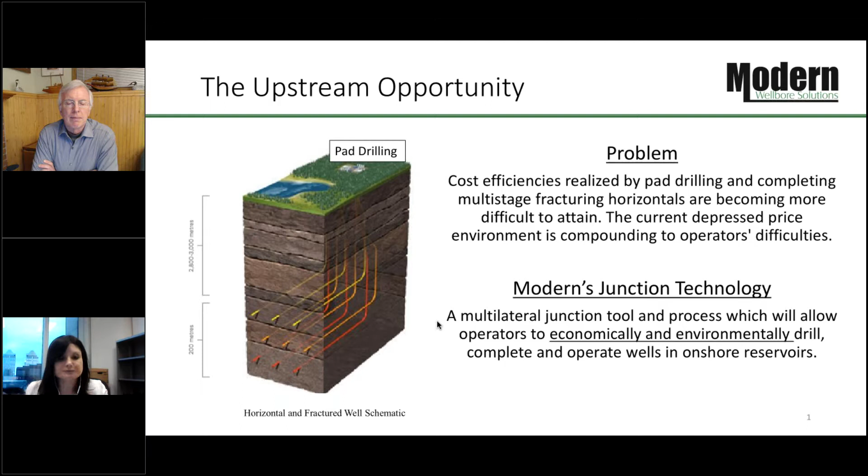Modern's Wellbore multilateral tool and process is an innovative solution to help reduce the petroleum industry's environmental footprint and foster social and economic benefits per multilateral well.

Basically, it works by a tubular system that couples and moves during operations to build the subsurface junction from the surface using a drilling rig. The technology can be run in the same or different fractured reservoirs, providing optionality to the end user.

Current technology options create the following barriers for unconventional resource development: multiple costly and time-consuming well entries in order to install current market junctions and options, limitations to the internal diameters of the junctions on the market prohibiting passing of fracturing tools, as well as the pressure integrity of the junction being dependent on costly well construction design and modification during operations, leading to costly operations for the end user.

Basically, Modern's technology realizes cost efficiencies to the end user through single entry systems into the well with no diameter barriers, and pressure integrity operations is achieved within the tool. We are a patent pending technology.

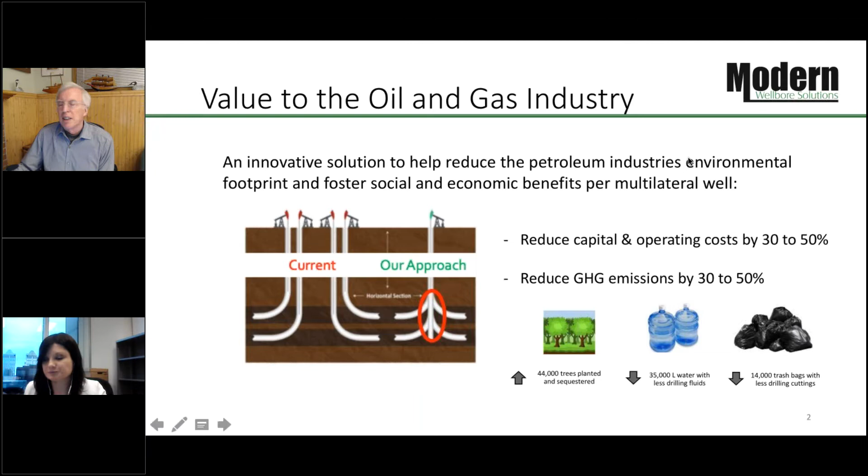Great, thank you Kara. That's a great overview, and it's from the network here. It's a non-traditional way of reducing both GHG and methane and fugitive emissions. And Shay, do we have questions from the audience? No questions so far, Mark. So I'll just ask Kara to elaborate a bit on both the GHG and the methane.

So the GHG are mostly from not drilling so many vertical wellbores, right? That's diesel and energy consumption. Yeah, exactly. So the bulk of the emissions are from less construction intensity at the front of the installation - bringing all of your materials to the well site and all your trucking, and then your rig time and the operations for drilling that vertical well down to your target zone of interest. That is the bulk of the emissions savings, due to the changings of regulatory requirements when all the methane, zero methane well site changes happening in the upcoming future.

We're constantly reevaluating and looking at our emission savings as we develop pilots over the next several years. We'll be quantifying that from the end user third-party validation. But yes, there is a significant savings from the construction intensity of moving away from a single wellbore lateral to one vertical and multiple laterals.

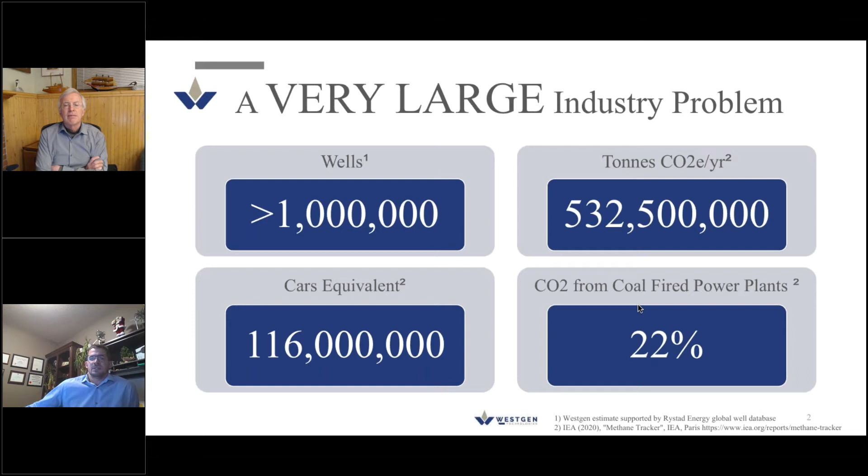Real quick refresher on how gas pneumatics work. In our industry, we use high pressure gas for things like opening and closing control valves, measuring process conditions, and running injection pumps. The problem is that on most remote locations, we don't have access to compressed air, so we have to rely on high pressure gas from the well. And after we use that, we vent it to the atmosphere.

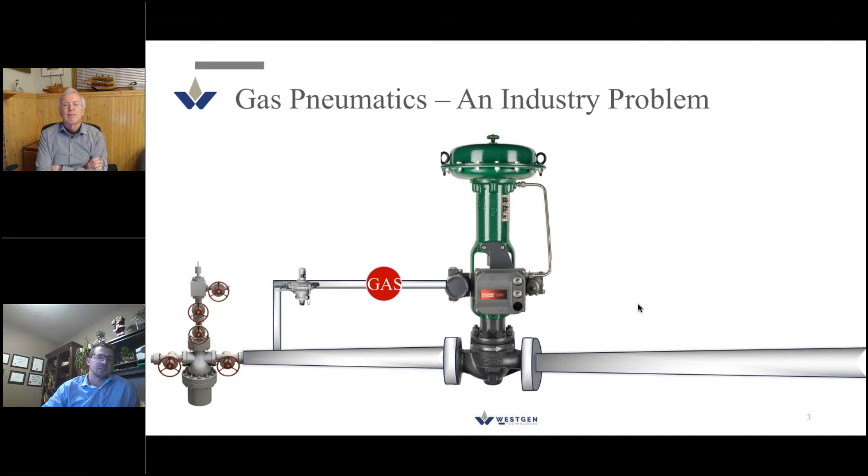There are 2 solutions to this problem. Electrification of actuation and pumps is typically a cost-effective route for smaller pads. This option can become cost prohibitive as you move up to more wells per site, typically once you get over 3. It also has a couple of drawbacks from speed and delivery times. The other option is to replace the high pressure gas with compressed air, keeping your traditional pneumatic actuators. Both options do require additional power.

When Westgen started up, we ran into a small problem with this that we didn't expect. We call this the power generation gap. I know it sounds a little bit ridiculous, but you can pick up a 5 kilowatt generator at Canadian Tire for less than $1,000. If you want something with the reliability you need for a remote location, they really don't have any technologies that fit between 5 and 30 kilowatts. Traditional options like TEGs and fuel cells tend to stick under about 1 kilowatt, and when you get into microturbines or traditional natural gas recips, you're over 30 kilowatts.

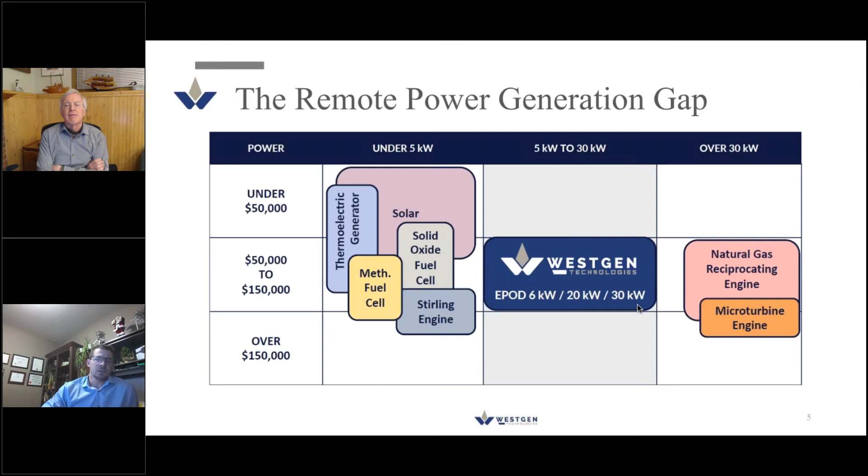So about 3 years after we set out to solve this goal, we developed the EPOD, which stands for Engineered Power on Demand. EPOD is primarily solar power, but has an internal combustion engine that backs up, capable of operating on raw well gas. For the first time, limitations of these engines related to fuel gas quality and maintenance interval have been overcome, while not causing increases to capital cost or maintenance costs for producers.

By integrating some of the common well site components into a modular shop fabricated package, we were able to reduce the capital cost of new well sites compared to today's gas venting designs.

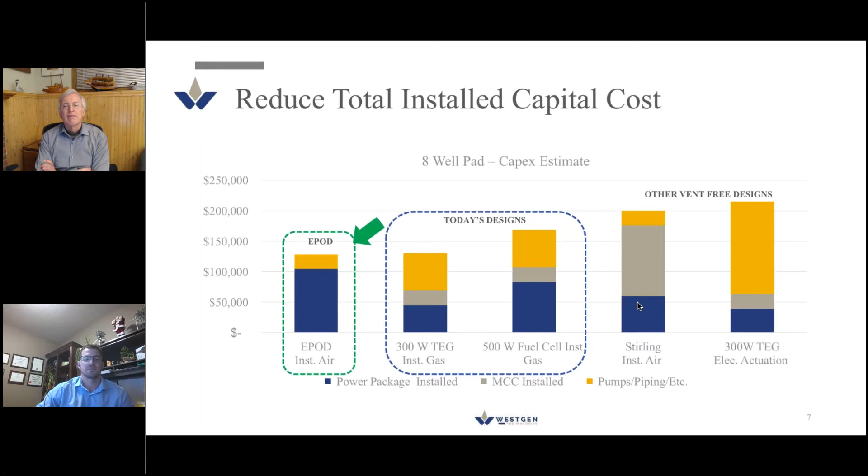By eliminating gas venting and reducing gas usage, the EPOD only burns 1 to 3% of the gas that you would typically be venting. We were able to increase the reliability of a site over winter by eliminating freezing conditions and reduce annual operating costs for these sites.

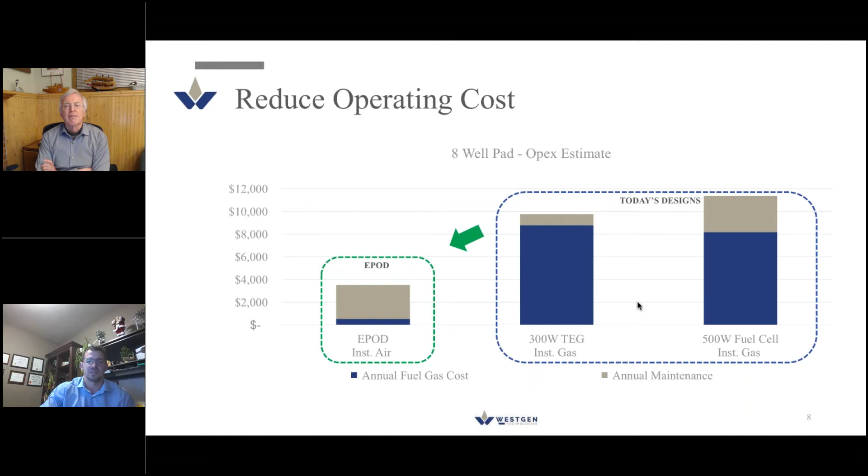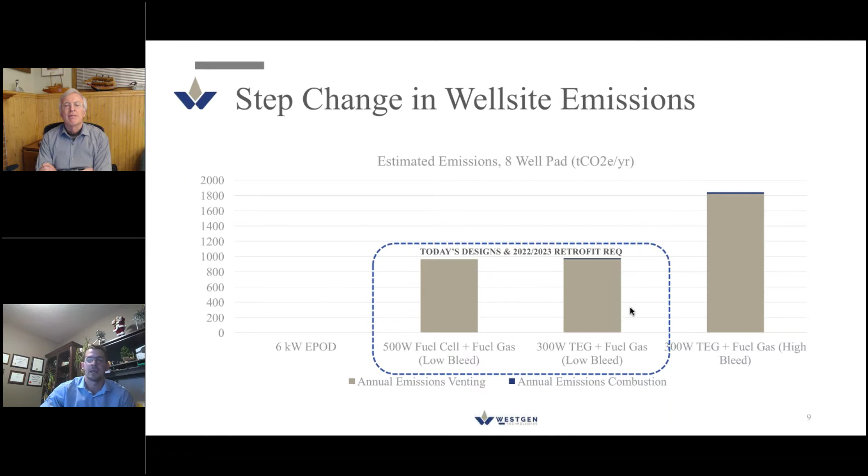We also worked with a recognized subject matter expert in the pneumatic emission space to estimate emissions from well sites. We found that even after high to low bleed retrofits were performed, there was still a large amount of venting from dynamic actuation of the actuators. By moving to an EPOD system, we were able to create a step change in well site emissions, going beyond low bleed and able to reduce emissions by greater than 99% on an average well pad.

Within a first year deployment, we now have dozens of units deployed or in the works with 17 different oil and gas companies across Canada and the United States.

In the beginning of 2020, we started to look to move the solution into the retrofit market. The EPOD was designed with incorporating and modularizing as many features as possible to minimize fieldwork and construction time on new well sites. Existing well sites don't have this challenge. So with that in mind, we set out to develop a purpose-built solution for the retrofit market.

In conjunction with Emissions Reduction Alberta and Sustainable Development Technology Canada, as well as 11 producer partners, this project kicked off over the past summer. As part of this project, Westgen conducted field monitoring of dozens of brownfield sites to better understand real-world design conditions and improve modeling of emissions.

Westgen is currently in the process of deploying 10 EPODs to legacy sites for the purpose of data gathering. By coordinating the design, construction, and maintenance of these units, we're able to develop a better development strategy and understand some of the difficulties that we face when deploying these on legacy sites.

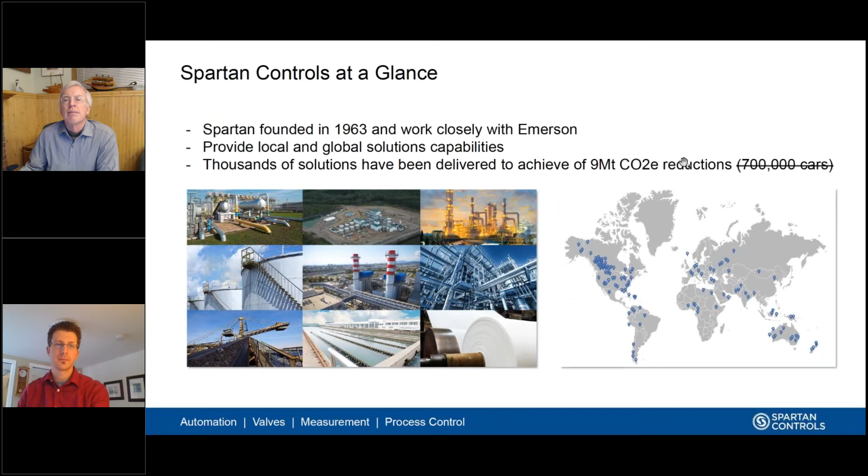So I'll introduce Kendall at this point, and he can share some background as well. Yeah, thanks, Brian. Hey, Kendall here with Bonavista. Bonavista is a mid-size natural gas production company based primarily in Alberta. My recent focus has been looking at GHG reduction projects, and I worked closely with Brian and Spartan on installing an LCO air compressor and glycol heat trace pump.

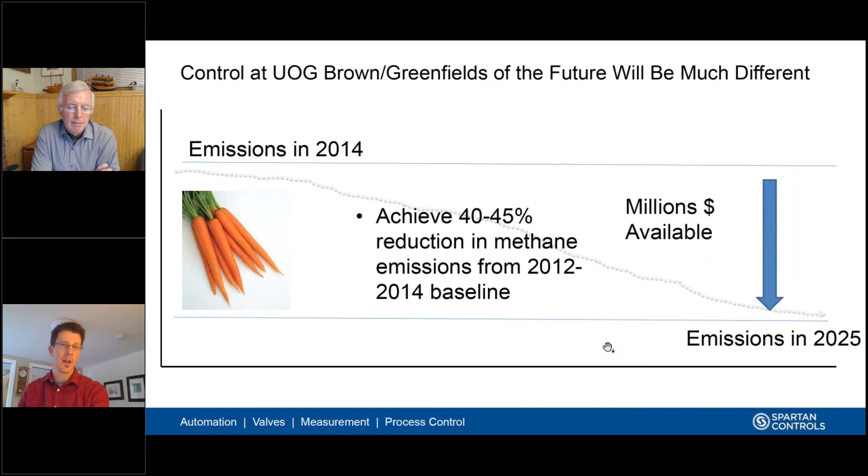Perfect, okay, so back on the slide deck. For those of you that were able to join at the methane emission reduction forum online, I had this slide as well. Industry is faced with this goal of achieving a 40 to 45% reduction in methane emissions from a 2012-2014 baseline. There are millions of dollars being invested in this, and we view that as a carrot for industry to take steps towards compliance in a more cost-effective manner. So kudos to PTAC with the support they've provided through the Methane Consortia program. That's really been an enabler for the adoption of the LCO Crossfire as well.

So if you're not interested in carbon offsets, there's opportunity with other levers as well that can reduce your capital cost to implement. PTAC has this program supporting the LCO Crossfire both as a chemical injection pump, electric, and an air compressor, and we have a project window until May 2021. What was really nice about this funding is that we had a decent window to apply for it, and once you get the nod, a decent window to implement. So we're achieving a specific, measurable, achievable, reasonable, and timely outcome. It was really well set up.

With the PTAC funding, 50% of the costs can be covered, provided in 3 increments. Upfront, they give a third of the capital of their 50% towards getting it going. Then upon proof of purchase and installation, we can have the other third provided. And once you've shown what that technology was able to achieve as far as CO2 reduction, we get the final third from PTAC.

What's also really valuable is that this is stackable with the MTIP funding. You still need to meet the criteria of MTIP, making sure that your technology is less than $130 per ton on an annual basis, or less than $40 per ton in the lifetime of the project. These can be combined to actually fully cover the capital cost of the project in its installed condition. Again, really helpful that these funds are available until May 2021. So if there's no interest in achieving an ROI with carbon offsets, reducing your upfront capital cost is certainly advantageous as well.

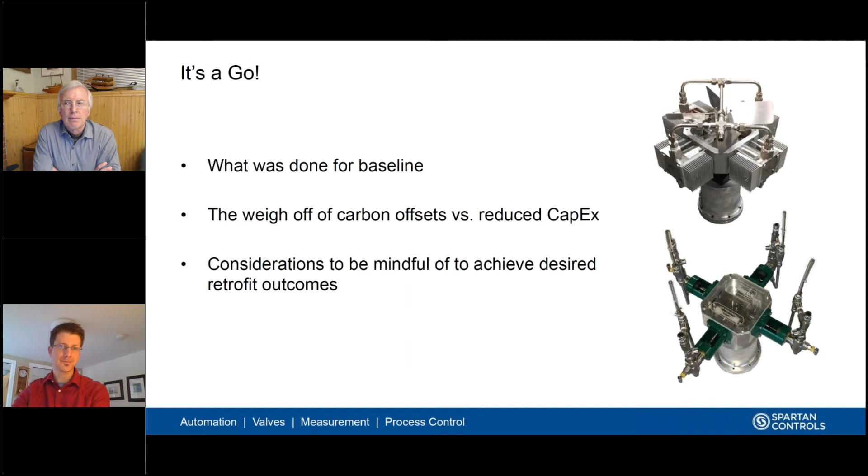If you drop below too far, then you may not be able to fully stroke the actuator, or fully stroke a chemical injection pump if it continues to run on instrument air, and therefore be unable to inject it into the process line at the needed flow rate required.

There were some leaks that we came across that needed to be fixed that were not associated with venting. These were more fugitive leaks, that they weren't leaking by design, but they need to be maintained. So it's really important to make sure that you're sizing the system, that it's fit for purpose, and that's achieved by mitigating some of the unplanned foreseeables as well.

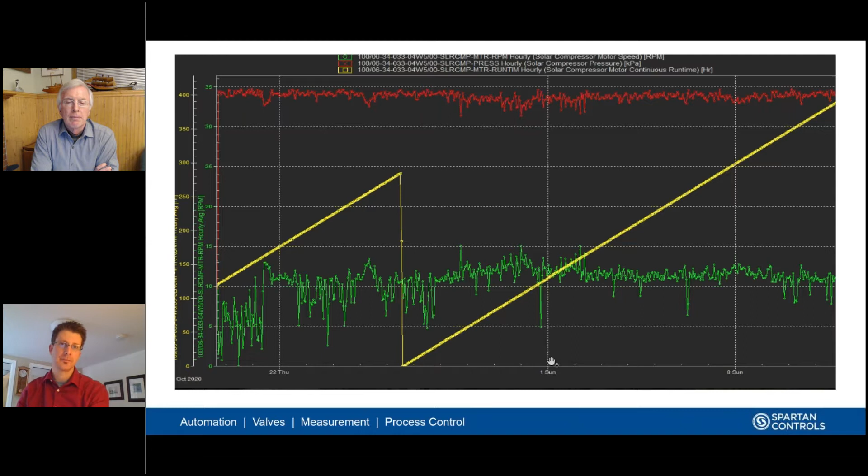Next. So I mentioned baseline, so what was done for the baseline? We want to reduce or eliminate - that's really the question we're asking ourselves.

If we're going to eliminate, one of the options is to shut in that asset. I don't think anyone here in Alberta or the Western Canadian Sedimentary Basin really wants to shut in a producing asset that's profitable prematurely for venting or fugitive conservation. So then we're left with: could we capture what's being emitted? Could we electrify the site, or could we use instrument air? All three of those are pathways to zero.

So then we need to figure out what sites are the best candidates. And if we're going to figure out the best candidate, we have to consider all the criteria that are there. We're mindful of the CO2 that's available to be generated, and that's tied to your fuel gas use, whether that's purchased or could be sold through its conservation.

We also want to understand what type of asset is actually venting. This goes beyond just merely making models - it's really important to be a subject matter expert in that domain, so we can provide more specific and holistic information. As Brian touched on, there's conservation with steady state reductions, but then there's understanding how active that control loop itself is.

How much is that actuator actually moving? And are there any other venting forms associated with the instrument? So you can have steady state, you can have the output pressure, and then you can also have a form of venting that's called transient. I know that was a consideration criteria with a level controller that we recently improved as well.

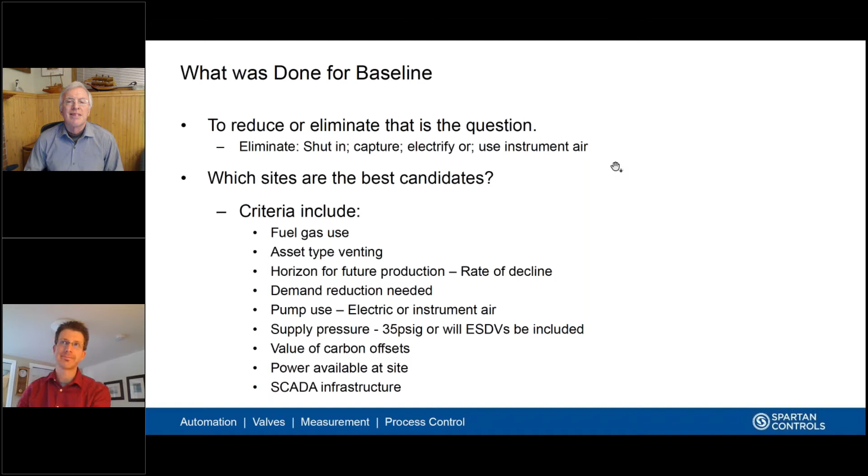Typical carbon offsets, again, are available for generation over an 8-year period of time, unless otherwise specified in the protocol specifically.

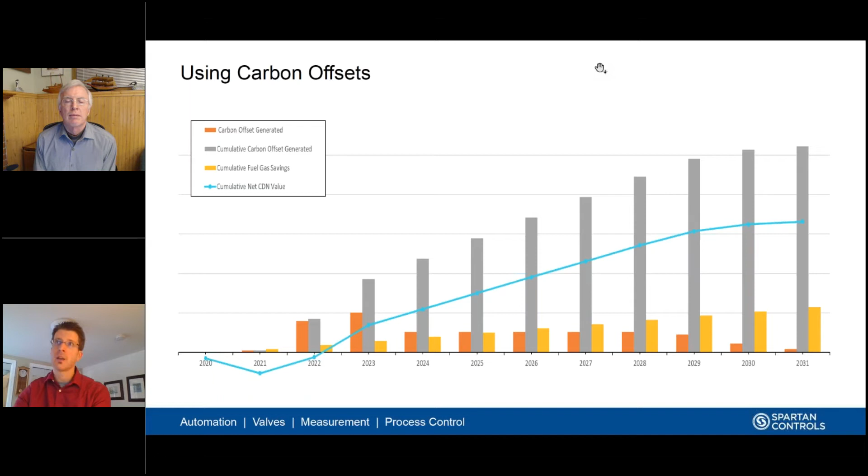So here we have a situation where we're not interested in carbon offsets, and here we just want to reduce our capital costs. So PTAC is instrumental in this regard, and if it can be stacked with the methane technology implementation program, we have the opportunity to recover that capital cost really quickly and realize the fuel gas savings. If the fuel gas cannot be sold, though, it's not really a value adder per se for the wellhead production - maybe this is an oil site and that fuel gas conserve just doesn't have the infrastructure to actually bring it to market.

If we do have that infrastructure, though, as you see on the next slide, then there can be a case for reducing your CapEx but still achieving an ROI because of the fuel gas saved as well. So it really depends what your goals are, as I mentioned up front - what the outcome is and how you want to plot your journey on achieving that outcome. There are certainly different ways to tackle this, and it really just depends on the drivers for your organization.

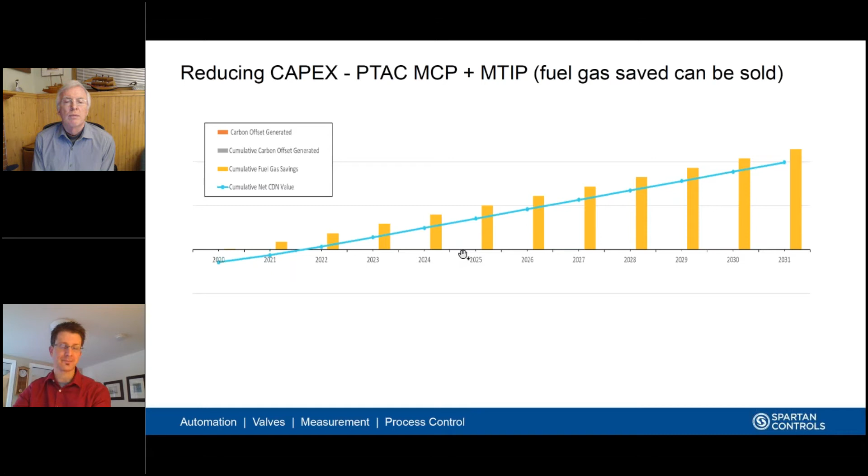We also want to be cognizant of the near and long-term outcomes. If we are willing to have a longer ROI on an air compressor, then certainly that's an acceptable opportunity through carbon offsets. But if we really focus on the near-term cash flow available, we want to make sure we're addressing that as well with a program like the MCP or MTIP, etc.

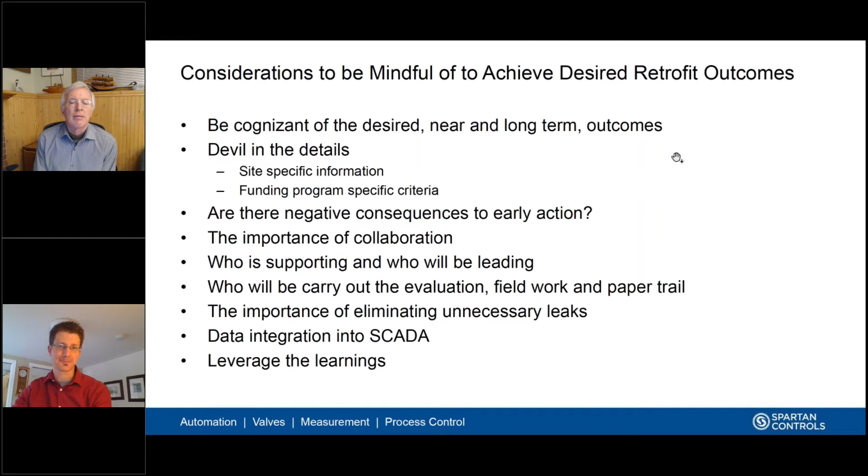So just checking if Kendall has final comments to provide on experience at Bonavista with these programs.

Yeah, no, I think Brian pretty much hit all the high points there. I don't really have a lot to add. So it's good to have all these options, right? Not all sites are the same, and not all circumstances, like Brian says, the baseline. So it's good to have options to find the right option for the right site.

So Shay, do we have questions? No questions so far, Mark.

All right. Brian, I just want to, it's probably obvious maybe, but just to reiterate from your side, it's a great time to be in for the industry right now, because there's a multiplicity of options to get the emissions down, whether it's in air or chemical pumps, or like putting everything down hole, like Kara at Modern Wellbore described. And there's also a multiplicity of funding mechanisms depending on the financial objective of the oil company or the baseline and the sites, right? So you can help people navigate through all that.

Absolutely, yeah. And I can add too that the MCP program still has opportunity to be aligning with other producers to do more work like I've described here today. So we have that window till May, and I'm happy to engage folks that are interested if there's a desire to do so. I should also add, Steve Froller wanted to pass along thank you very much to PTAC for the support to the organization, and also to the Industrial Research Assistance Program with NRC and Alberta Innovates too. You can see how integral those funding channels are to the commercial availability of this product here, built and made here in Calgary, which is a pretty cool story.

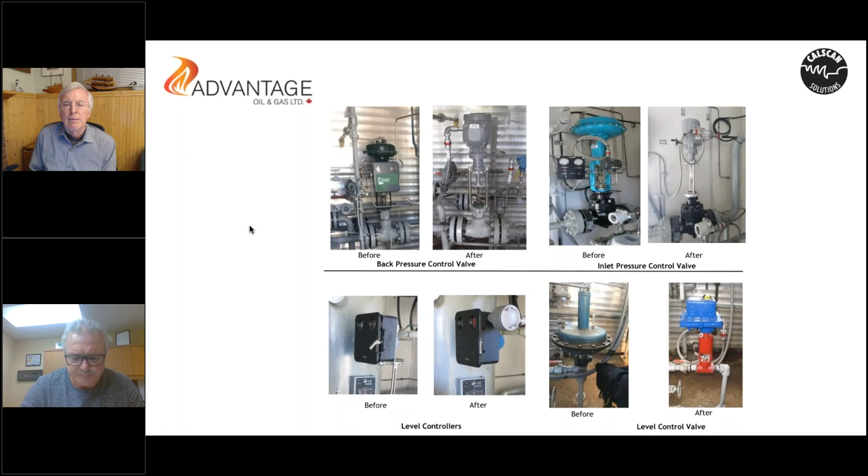Okay, next screen. And this I'll move over to James Martin, who has been one of our partners, consortium partners on our project. I'll pass it on to you, James.

Okay, thanks, Henry. So yes, I'm James Martin with Advantage Oil and Gas, and we're trialing this technology here from Calscan on electric chokes. Advantage is interested, for obvious reasons, in eliminating our methane emissions for all the reasons that Emil did such a good job explaining in his presentation. I notice he's gone, so Kara, if I could please ask you to pass on my kudos to Emil there. He explained very well why we want to get rid of those emissions.

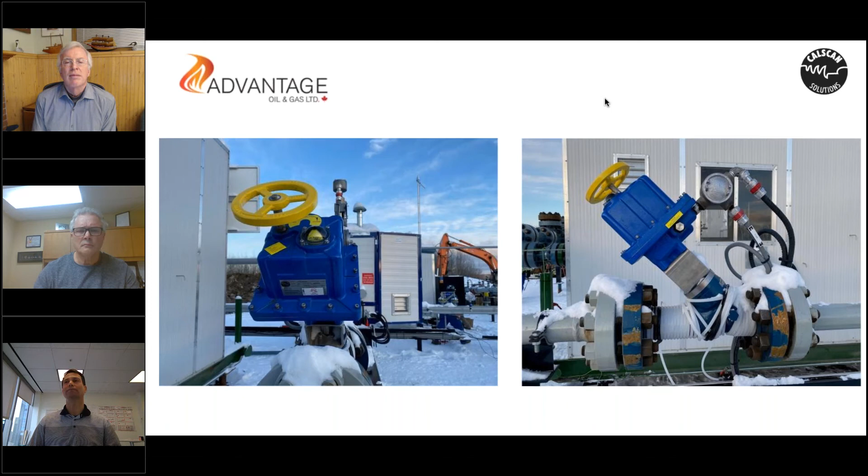Awesome. Very good, James. So, Henry, do you have some closing comments, or should I go to see if there's any questions?

No, I think, just going back, adding to James on the choke side of things. Again, those ones were 4 to 20 milliamp control through their RTU. Very low power, and didn't really have to upgrade any of the tags they have on site. And also we're adding our fail-safe modules at those sites.

That made a big difference for them on HAZOPs, making sure it is fail-safe. We have a heartbeat checking the RTU all the time. If the RTU fails, we can shut things down. On electric controls, that's very important to make sure we're able to shut the wells in safely, without having any kind of spills or damage.

So your approach is minimizing intrusion, if you will, at the well site, and therefore cost, and maximizing reliability as a result. Correct. Okay, so Shay, do we have any questions?

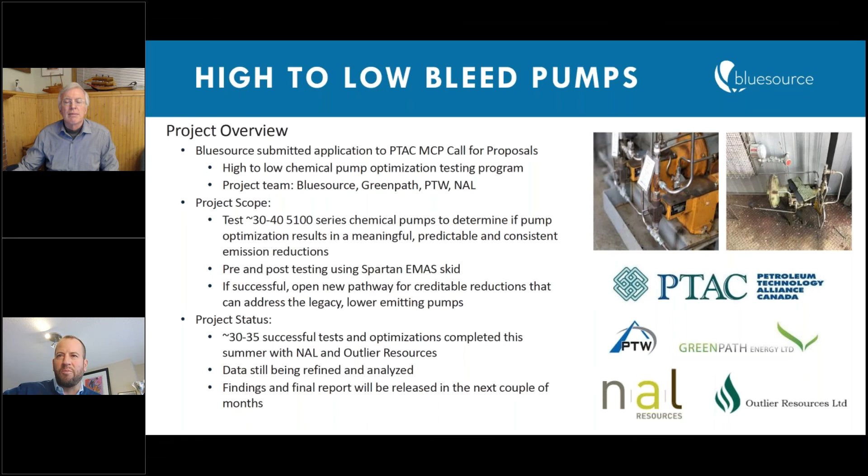So the status of this project is we've completed the testing. We have the initial data results. The data still needs to be refined and analyzed to complete our assessment, and we'll be looking forward to release a report in the next couple of months.

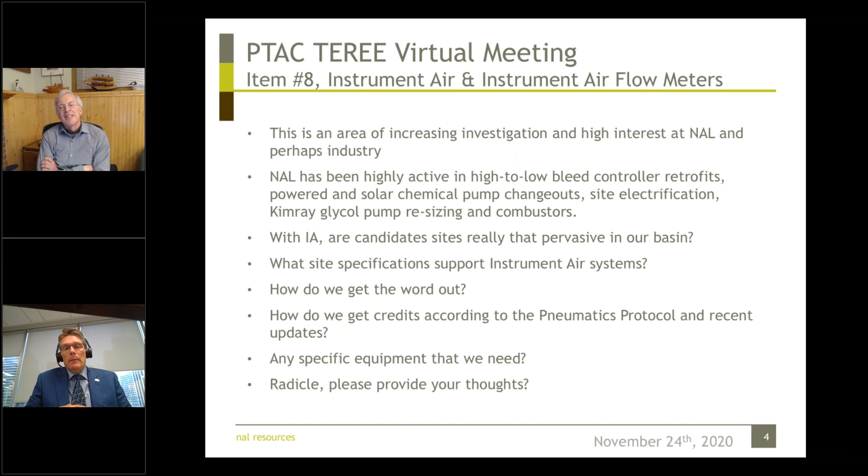What the site characteristics are, I'm looking to start more conversation on the broader scope of instrument air, and coupled with instrument air is the instrument air meters themselves. I understand and I'm knowledgeable enough that you require an airflow meter that can measure the amount of air going through the system, so that you can establish credits off of that variance or differential.

Those airflow meters need to be of a certain accuracy. You can buy the cheapest one on the market, but if it doesn't have the range and the accuracy, you may be giving up more on the crediting side than you've saved on the instrument meter itself. The pneumatics protocol has been updated, it's been extended, and I think the future is very bright for instrument air type applications.

I think it's all part of the stew. When I look at NAL's asset base, I went to the population and said, hey, we've got some funding out here, well what's the opportunity from an instrument air standpoint? Guys in the field have their deep-seated feelings — tried it, don't want it, or they're stuck with one vendor. But as credits have evolved, they don't understand the implications of sort of going back to what they're used to.